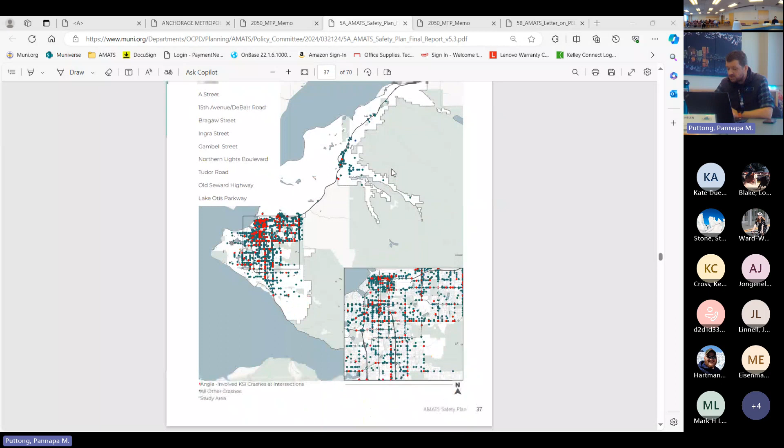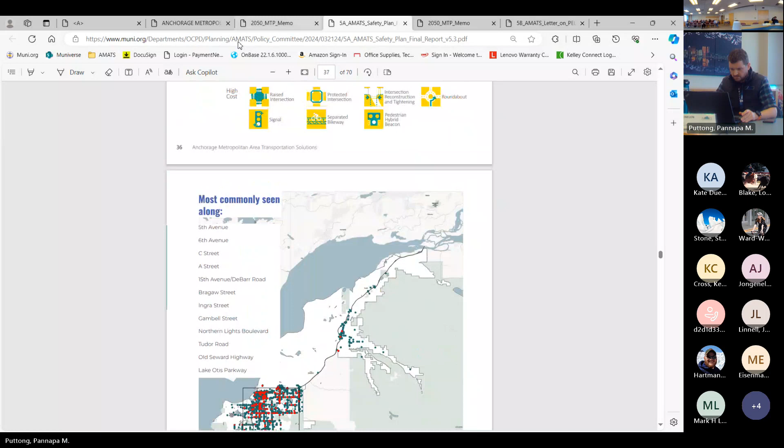And so there are five profiles, and they all have that kind of information, as well as information about their locations, the typical, most commonly seen locations. And if you could scroll to page 46 real quick.

So this is chapter 5, where we're talking about priority locations. This is where a number of locations were developed. You can scroll down two or three pages to page 49. So this map right here shows the crashes, intersection and segment crashes for our community.

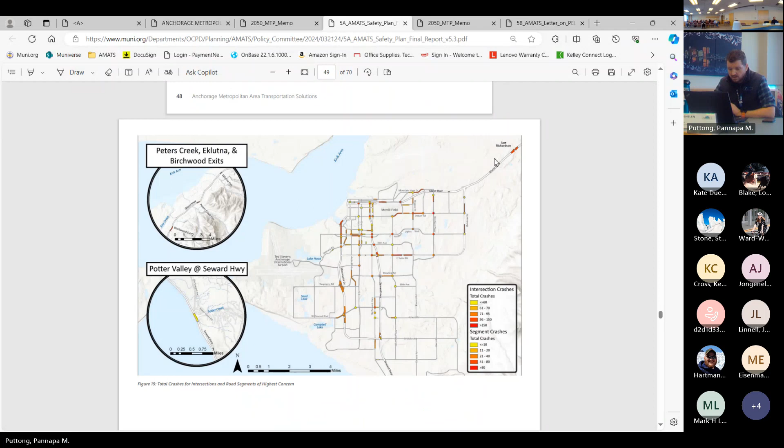So this is both Anchorage and Chugiak Eagle River, and it shows the areas with the highest crash numbers. This is what really drove a lot of the profile information that we talked about before, in this chapter. This chapter took a look at the crash information that was gathered, the data, and then developed a number of additional considerations, equity, which you can scroll down one more.

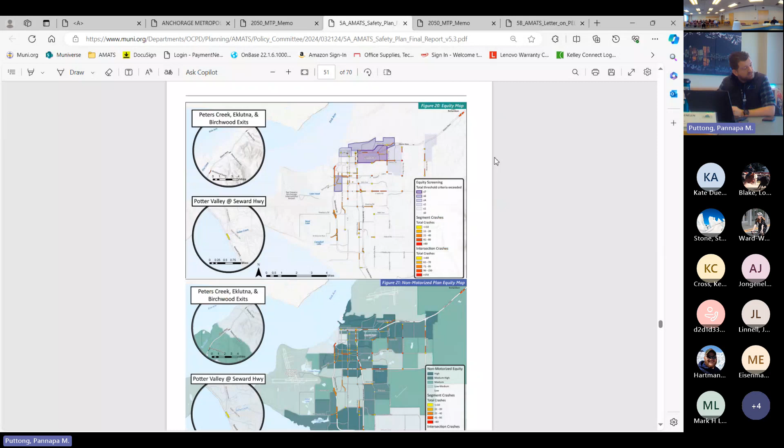There you go. So we talked about equity and then priority modal networks for the non-motorized plan. Scroll down one more - you can see the maps that were developed for equity. And if you scroll down a little more, you can see the maps developed as part of the non-motorized network. So we basically compiled all this information to come up with priority locations that should be focused on as part of this plan. Go ahead and scroll down to page 55.

So these locations were prioritized into two tiers, tier 1 and tier 2 corridors. Tier 1 corridors were the ones with the highest crash numbers, but already have projects programmed or planned for them.

As you can see here, Minnesota is one example. We already have a Minnesota corridor plan underway that will take a look at what to do in that corridor and can account for the crash information developed as part of this plan, making recommendations on how to address it. Same with Tudor, A and C Street, 5th and 6th also have plans.

Tier 2 corridors were selected or developed from high crash areas that don't have projects already planned or programmed. You can see a number of the corridors are in Northeast Anchorage, and then a couple in South Anchorage.

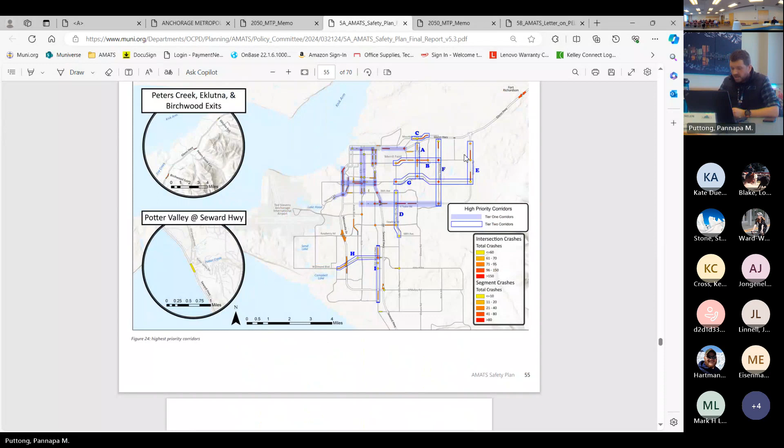If you can scroll down to page 57, please. There were a total of 9 corridors that were selected or identified through the priority assessment and provided for public review and discussion during the stakeholder and public meetings. Out of those, 5 locations were prioritized for further review and investment to include as a corridor profile. Go ahead and scroll to the next page and we'll go through these one at a time.

The first one is Bragaw Street, corridor A, Northern Lights Boulevard to the Glenn Highway. As you can see from this map, there is a list of the types of countermeasures that can be used, the notable collision patterns observed, and the collision history. This is going to be helpful as projects are developed, since safety is one of the considerations for projects. It helps guide some possible countermeasures to address concerns in the area.

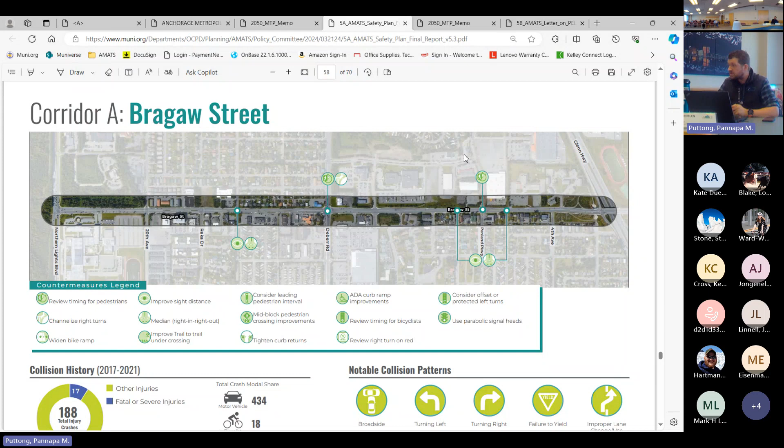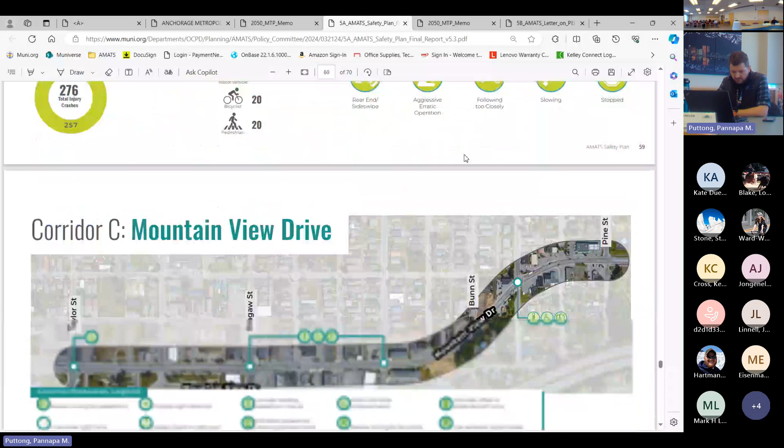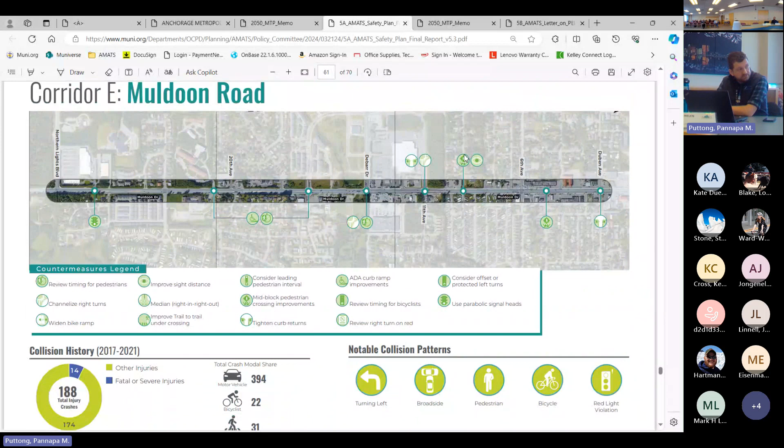Next, corridor B is DeBarr Road from Lake Otis to Boniface. Next is Mountain View Drive from Taylor Street to Pine Street. The next is Muldoon Road from Northern Lights Boulevard to Debarr Road. And then the last one is Northern Lights Boulevard, from Lake Otis Boulevard to Muldoon Road.

So this plan, hopefully if it gets approved, will start to be integrated into the AMATS process. It's anticipated that as we develop future criteria for our MTP and TIP, we'll start referencing the AMATS safety plan to show that projects are aligned with our safety plan or helping to address these priority locations that have been selected. There's a lot more that can go into it if needed, but I think I'll stop there and see if you guys have any questions.

Thank you, thanks Aaron. We did have a joint committee working group on this. Yes, we did, the Technical Advisory Committee of the Policy Board. I don't know that everybody showed up, but it was helpful.

Does anybody have any questions or comments from the committee for Aaron? Are we doing comments now, or questions and comments? It's questions and comments from the committee, then it opens to the public and comes back for action. I have a comment then.

Page 42 of the plan talks about potential engineering countermeasures when there are no bike lanes. One of the low-cost potential engineering countermeasures is prohibiting right turns on red.

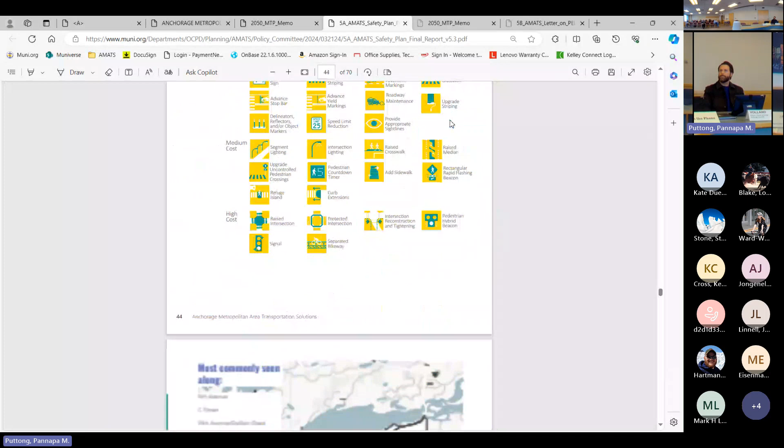I hate to be legislating traffic laws, but besides that, we talked about it at our working group, there's a few errors in the data. The ones that came up were, for instance, on page 41, it speaks to crashes indicated in areas of no sidewalks. But on that page it has 3 roads as examples, and all 3 of those roads have continuous sidewalks from start to finish. Similarly, on page 45, it speaks to uncontrolled accidents that occur at uncontrolled intersections, but then some of the data shows crashes on intersections that are clearly controlled.

I know it's important to get the plan approved so we can move forward for funding, and I don't know that any of those errors are significant. But my thought was maybe we could, and I know the data comes from a different source, it comes from APD and they fill out a form. Maybe that form needs to be improved, but I don't think we're here to do that. My thought was maybe just a sentence in there somewhere that states that some of this data might not be 100% correct. I believe there was probably a crash at the location or near the location shown on the plan, but the exact circumstance might not be 100% correct. So that's the edit I would offer.

I'm not sure of process and how I should offer that. That would be after we get a motion, then an amendment can be made to edit that.

I'll speak on that quickly to provide more information. We have consultants here who helped with this, who could probably speak better, but it is difficult for us on this plan. One challenge is the data we gathered was from the municipality of Anchorage, and the municipality assigns crashes or incidents to the nearest intersection. So when the report's filled out, it could have happened not at that intersection, and there could have been no sidewalk there or no control type at that exact location where it happened, but when it's entered into the system, it's assigned to the nearest intersection. I think these are good comments, and that plus the data gathered from APD speaks to the need for further discussion about how the data is collected, managed, and entered into the systems.

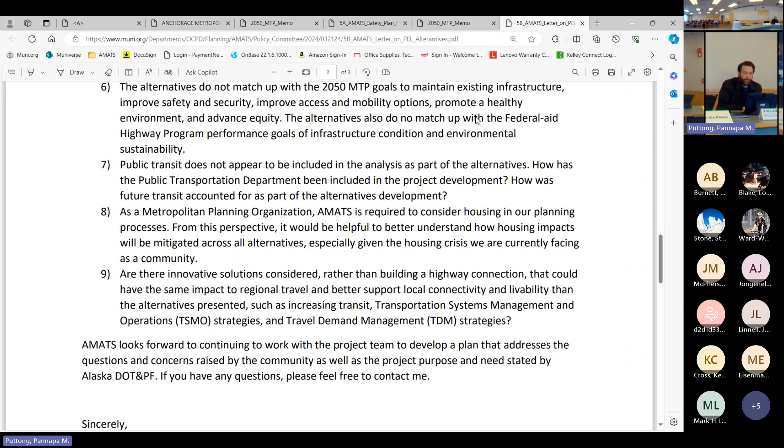That impacts to community institutions should also be analyzed and presented. Capture that sentence: that impacts to community institutions should also be analyzed and presented. Do I hear a second to that motion? I'll second for the purposes of discussion.

Dan, would you mind giving more information as the reason for this? Thinking of Greater Friendship Baptist Church, historic places in Fairview, I think really representing honestly to the community what those trade-offs look like when it comes to right of way, which historic community institutions would have to be relocated with some of these alternatives. I think presenting that in an honest dialogue, what those impacts are, is really important to the community.

I think that's part of the process anyway, so I won't object to that amendment. Any other comments, Mr. Chair? Mr. Young, is there an opportunity to add a friendly amendment to the amendment? We allow friendly amendments. Yes, I would offer a friendly amendment that would add public and private institutions, because I think there is a need to analyze things like Merrill and impacts to Merrill.

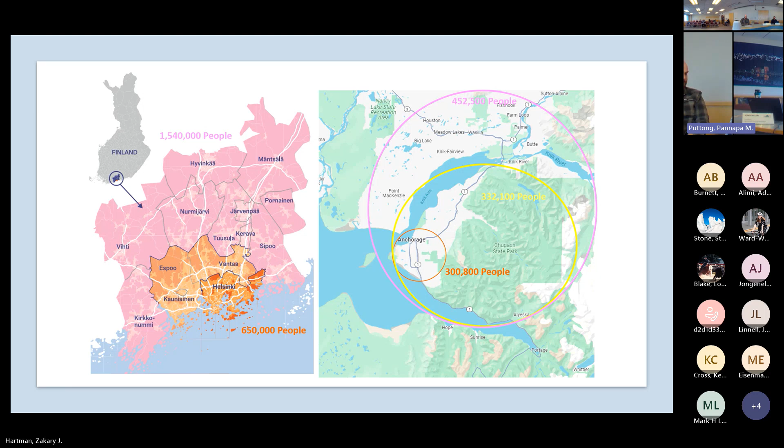Just to do a quick comparison, so we understand the differences between Helsinki and Anchorage. Helsinki is a lot older, and generally speaking these are scale images. I'd say they're about 3 times as population dense, both in their urban core and in their greater metro area, if you're including Wasilla and Palmer in that equation.

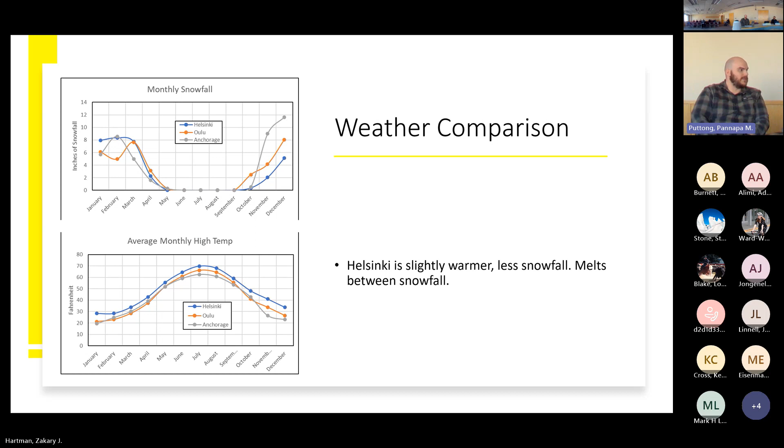Weather is the big one. You might have noticed in the first slide there wasn't a ton of snow on the ground. They're a little bit warmer, a little bit less snow, so they get an advantage where it'll get above freezing and some of that snow load will melt off, making it a little bit easier on them.

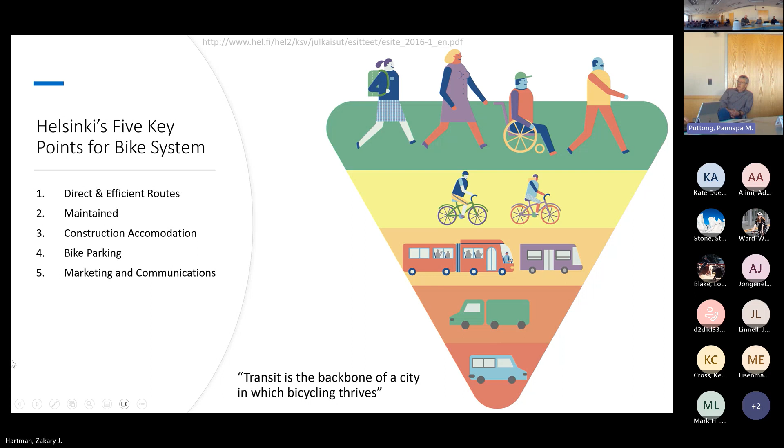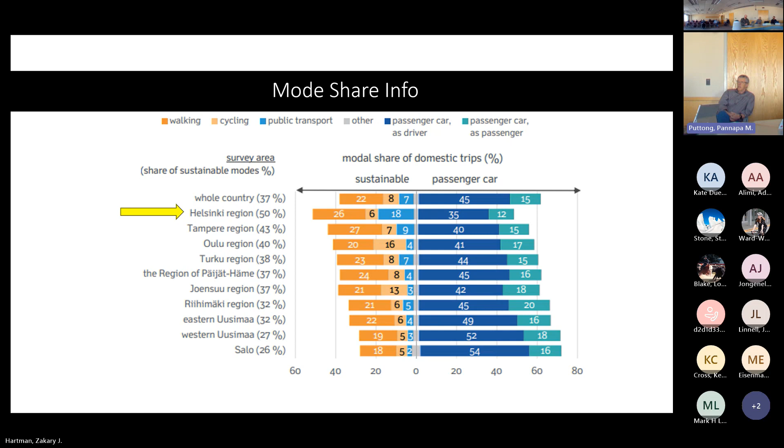Speaking of bike mode share, this is a snippet from their Finnish travel survey. They do it every 6 years, and they've been doing it since 1970. It's really cool to see geographically across Finland and through time how travel patterns have changed. Helsinki's highlighted here with that yellow arrow - the big dense city really shines when it comes to walking, shown in dark orange, they're right at the top for walk mode share. The light blue or cyan indicates their transit use: 18% is double the nearest city in Finland - 18% of all trips by public transport, pretty spectacular.

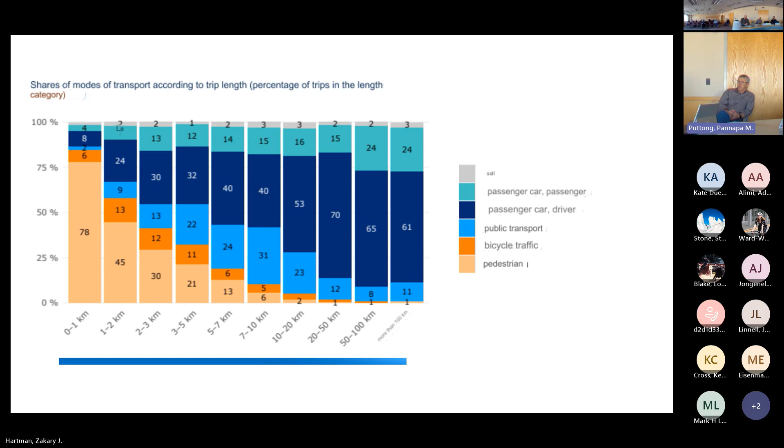So you can see in this graph, people tend to stop walking once it's more than 2 kilometers. They tend to stop biking once it's more than 5 kilometers, then public transport kicks in. And if it's more than 10 kilometers, or 7 miles, they still end up in a car. So this shows that walking, biking, and public transport each have to fit the right situation, and when it does make sense, maintenance and infrastructure can support a mode shift.

This was a fun fact: we learned that Finland is home to the most expensive traffic ticket ever, 121,000 euros, which was cut in half by the courts—it was greater than that originally. They give traffic tickets as a percentage of the person's income. A very wealthy businessman was driving 20 over the speed limit and a speed camera caught him. There's a quote at the bottom where he says, 'I really regret the matter.' So it looks like he owned up to it, even though there was a very hefty fine.

Finland has over 1,000 of those traffic cameras. I believe they're all on the national highway system, and 33 of them are on the highway network through Helsinki.

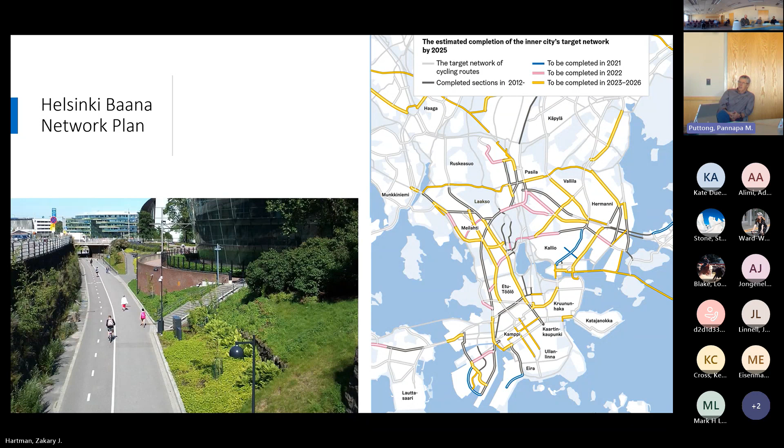This is the bike network they're building out to reach their ambitious 20% mode share goal by 2030. On the bottom left is a Baana, or bicycle superhighway. Basically, they're trying to take their 8-foot multi-use pathways that get a lot of use and expand them into bicycle superhighways. On the right, everything in yellow is their goal to build in the next 3 to 4 years to stay on track with their mode share goals.

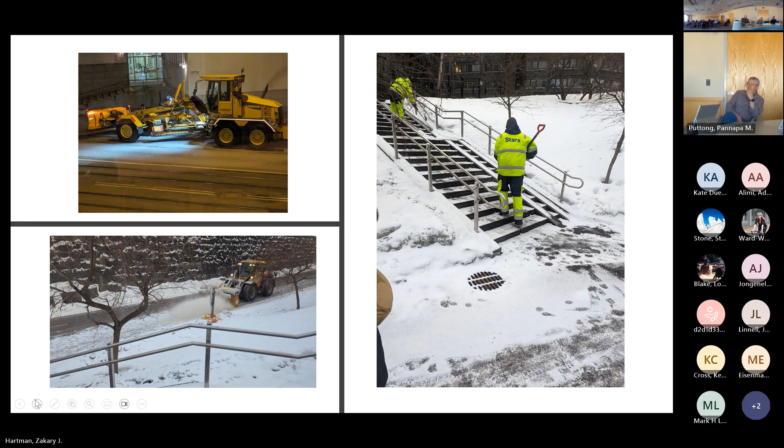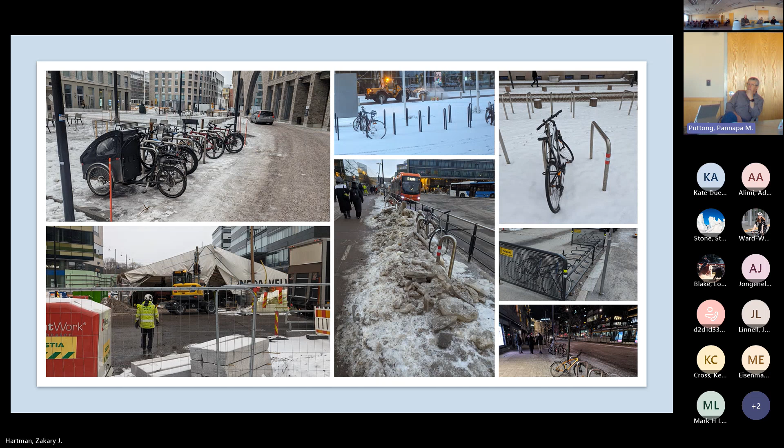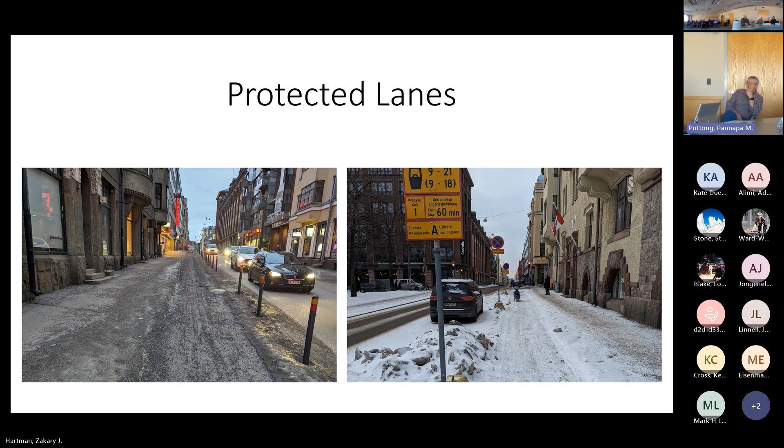Protected bike lanes—I was searching for examples, and these were the only ones I found in Helsinki: like a vertical protected bike lane. On the left is steel bollards on a street bike lane, and on the right is a parking-protected bike lane. So that's what I saw in Helsinki.

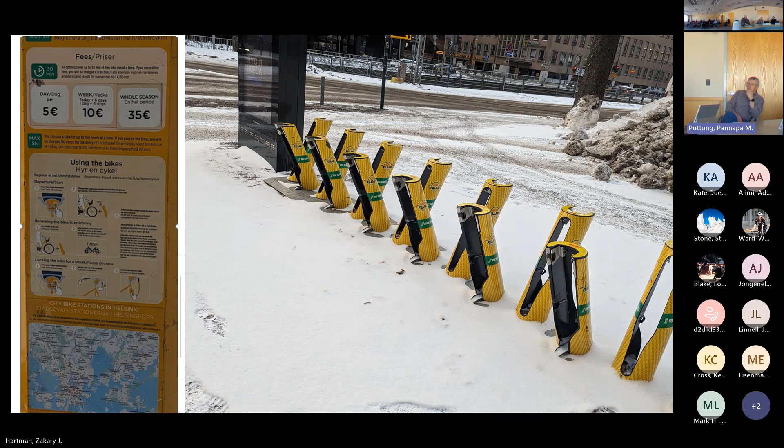One last note on Helsinki: their bike share system. We didn't get to try it out because it's summer-only right now. It's 35 euros for the entire summer, with pretty great rates. They're trying to expand into the winter and add e-bikes to their fleet as well. So that's a quick highlight of some of the stuff we saw in Helsinki.

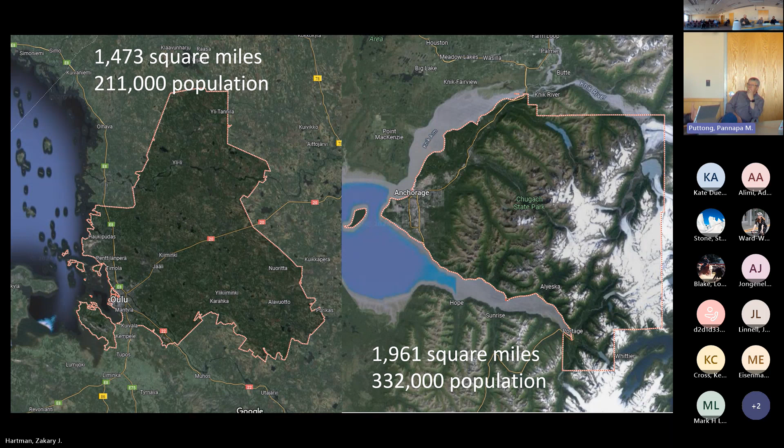Then we went up north to Oulu, much further north. It's still on a body of water, so I don't think it's quite Fairbanks cold, but it's very cold. They're much smaller than Helsinki—generally about 30% smaller than Anchorage, both in land area and population. These are scale images of each other.

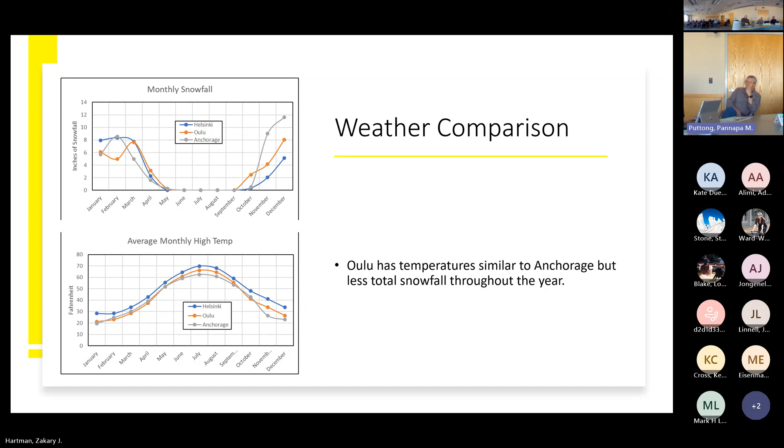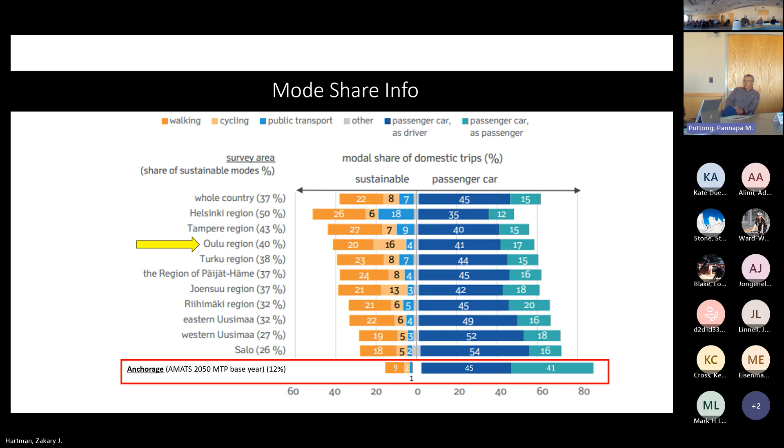Here's back to that mode share chart I showed you. I highlighted Oulu here — that lighter orange is the bike mode share. They're at 16%, more than double Helsinki. They are leading Finland in bike mode share, and they're proud of it. But still plenty of people driving cars, so they still have a plan to expand that bicycling superhighway network.

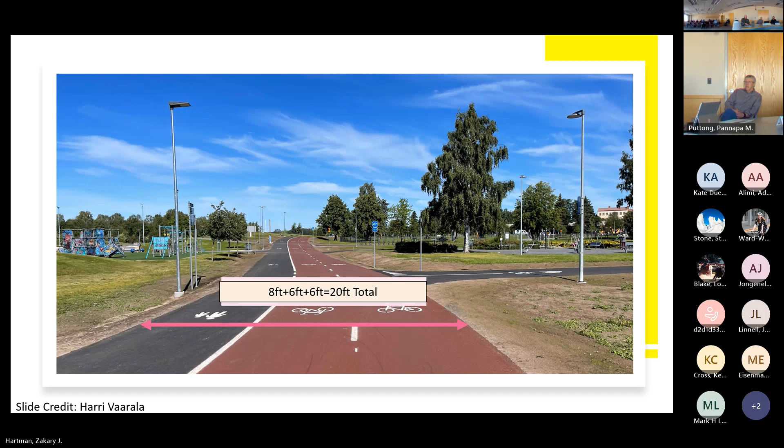A little more detail on what that looks like. When they build it out, 8 feet of black asphalt is for pedestrians, and then 12 feet total for bikes, two 6-foot lanes, one in each direction. That's what it looks like in the summer, in their general core area.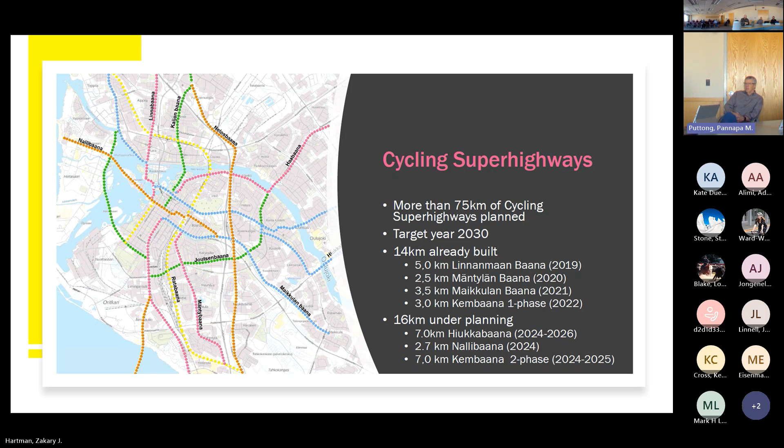I think it's worth pointing out, in the bottom right, these aren't big mega projects. That middle bullet point, 2.7 kilometers of the Nallibaana — that's just less than 2 miles of 20 feet of asphalt, like 2 car lanes. So these are small bites they're taking. They have everything planned out, but they're taking small bites every year to build out this bicycling superhighway network.

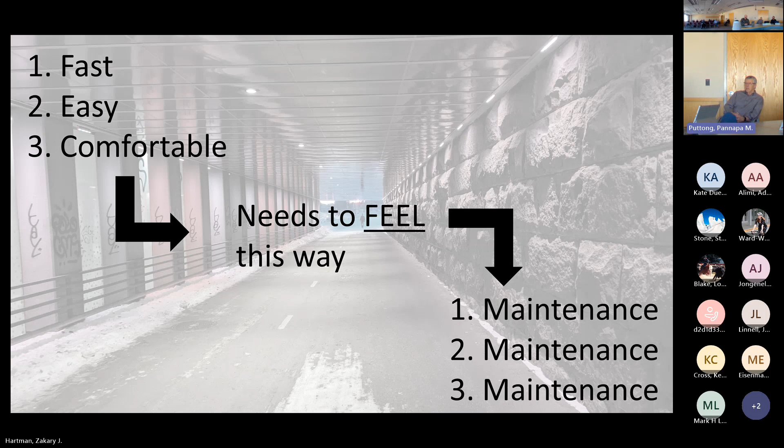This is what we heard from their city bike engineer: their 3 main points are fast, easy, and comfortable — that's what they want for their network. But none of that really matters if it's not maintained well. So what they really say is their 3 key points are maintenance, maintenance, and maintenance. And maintenance, Oulu seems to be very good at.

Their maintenance system generally has 10 areas. Area contracts — 2 are done by public sector employees, 8 by private contractors. In these areas they do everything: the road, sidewalks, pathways, it all belongs to them. But overlaid on top of those 10 areas, they have the bicycling superhighway maintenance contract. So across the city it ignores the administrative borders and just covers the bicycling superhighways. They've been tweaking that contract over the years, and they're proud of where they have it.

So they have these 11 key points they walked us through. From a high level, if I were to boil them down, I'd say you have to put what you want to see in the contract with tight standards, and then, more importantly, have tight quality control on those things. And then secondly, dedicated contractors, facilities, and equipment.

So there's one single contractor that does all those baanas, and within that contract they have 6 drivers and 6 plows, but that's all they do — 20 kilometers, and that's all they do all winter. One person — you know the guy that's plowing your path. They believe that focus really helps the quality and brings a sense of pride to it.

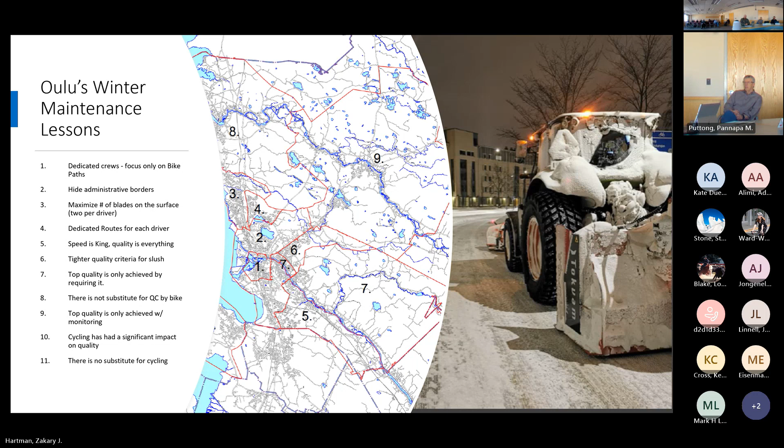This next slide is a good picture of what the bicycling superhighways look like in the winter. We rode like 6-7 hours over a couple of days we were there. It was -20 Fahrenheit, very cold. But we were just on regular bikes with narrow tires — we saw one fat bike the entire time we were there. People just ride what they ride in the summer because you don't really need to worry about it.

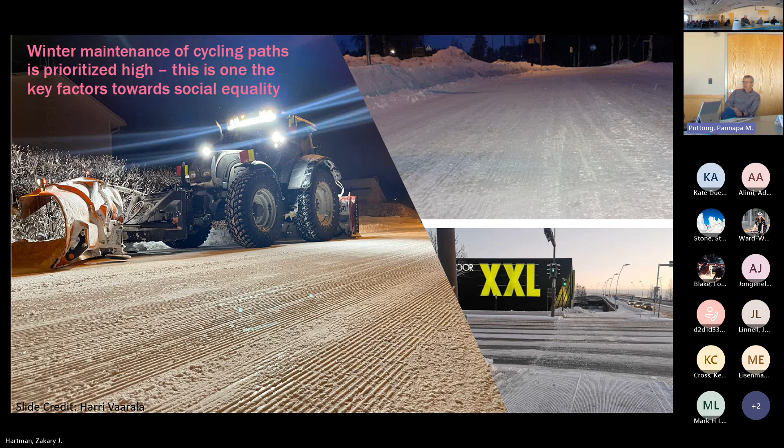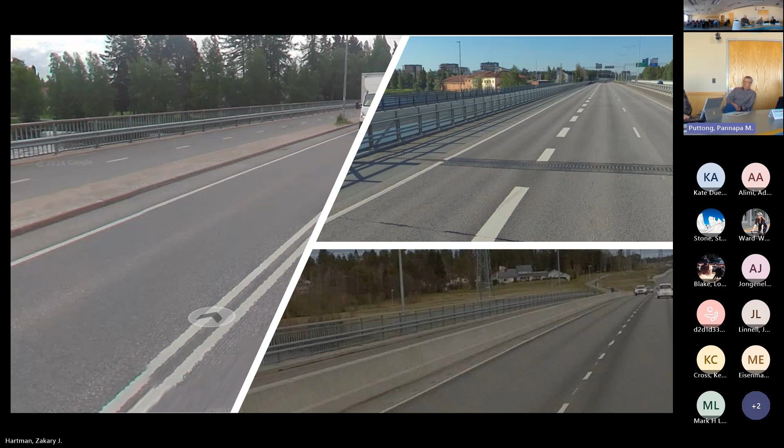And then they really struggle with the haul-out procedures, they just can't do a great job hauling it out. So they said what they like better is this other bridge on the left side of the screen, where it's more separated and you have many feet of space where snow can pile up, and when the time comes, it can be hauled out easily. Their best situation is top right, where you just build another bridge for the pedestrian. Easy enough, right? Just a new bridge. But that's what they shared with us.

Happy to answer questions. This slide deck is a lot smaller than it probably could be, but I don't want to eat up too much of your time.

Yeah, if you guys get the chance to go to Finland, you should go in the winter.

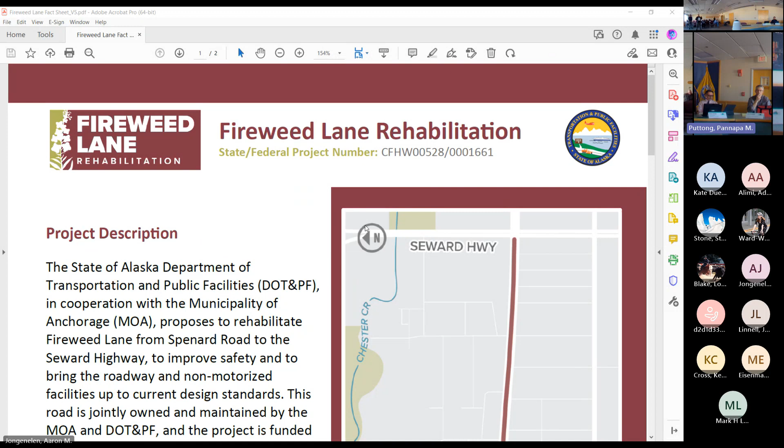We're here today without a presentation, and that's on purpose. The project right now is just engaging and kind of just getting off the ground. Our very first formal action as a project team is to go out to the public. So we've been speaking at a number of community council meetings - I think we've had 4 presentations in the last month, the TAC, and we're here today.

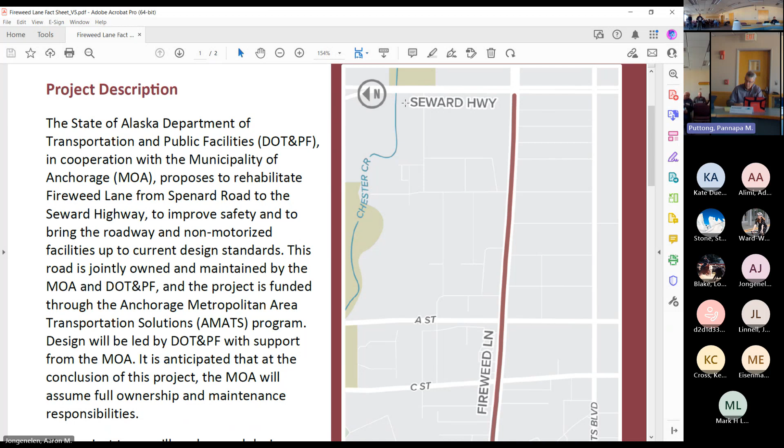The message that we're telling everybody is we've got nothing to present because we haven't drawn a line. We're here to open up the lines of communication, introduce ourselves, get people oriented to the website, and just kind of talk about the limits and talk about some of the rules.

I'm going to give kind of the same speech that we've been telling the public: this is a somewhat complicated project. As an AMATS funded project, it's a federal aid project. It's being led by DOT. The MOA is ultimately the owner. So there's a number of different rules in place here. And it's a federal project.

We've been talking about 2 laws that we have to follow. One, the National Environmental Policy Act - you hear about NEPA quite a bit. That puts some sideboards on things we must look at and talks about steps we have to take. We're also talking about the Uniform Relocation and Real Property Act, or the Uniform Act. That's a set of laws that govern the right-of-way rules, if we get in a situation where there's impacts to right-of-way. So we have to have that in mind.

But as an MOA-owned facility, ultimately we're following the context-sensitive solution process, or the CSS process. So we'll be before planning and zoning, we'll be before UDC, we'll be following all those project delivery processes that we're all familiar with. So 3 big processes or laws that we're following.

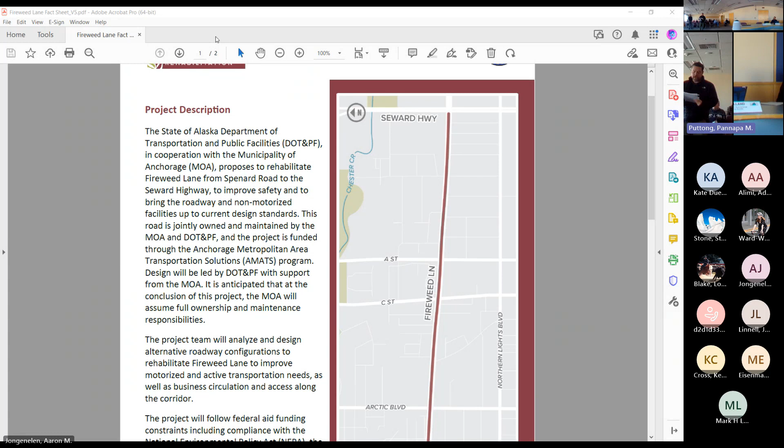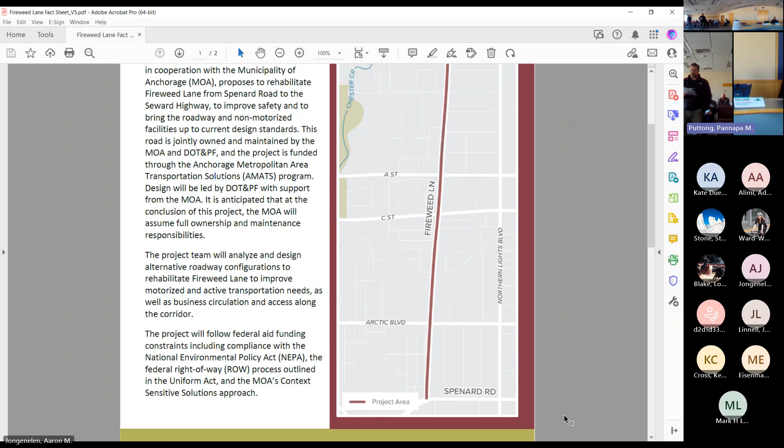I'm going to read our purpose statement, so I make sure I say the exact same words we've been saying. This is what we're telling folks the purpose of the project is: The MOA and DOT are proposing to rehabilitate Fireweed Lane, from Spenard to Seward Highway, to improve safety and to bring the roadway and non-motorized facilities up to current design standards. The project team will analyze and design alternative roadway configurations to rehabilitate Fireweed Lane to improve motorized, active transportation, and business circulation and access.

What we want the takeaway message to be is simply 3 things we have to keep in mind. We have to deal with traffic on the roadway and acknowledge that we have major signalized intersections, terminals, cross streets, 10,000 cars a day on the road. So we have to deal with that.

But we also have 81 businesses - I think there's 81 businesses or private parcels on the corridor, and there's 3 schools on the corridor. So access and circulation are huge. That's a key thing we have to deal with.

And then finally, the active transportation community, the pedestrian bicycle community, almost doesn't have facilities at present on the roadway. So we're not meeting ADA standards with stuff that's out there in the world. We have utilities in the middle of our sidewalks. We don't have a lot of space. It's not serving everybody. So these are the 3 things we're dealing with on the project.

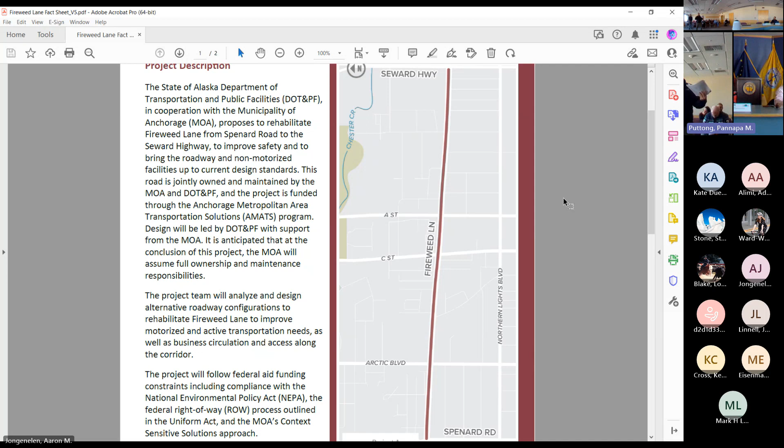And then we're going to look at a couple of combinations, because Fireweed Lane has different utility as you move from west to east. So we'll look at some combinations of 2s and 3s, or maybe 3s and 4s—it might not be one monolithic cross section, I guess is the point I'm trying to make. So our primary source documents are the corridor plan, the non-motorized plan, and the design criteria manual.

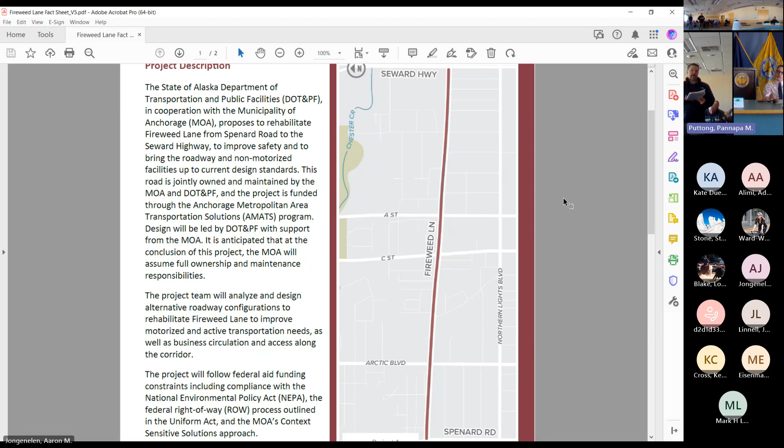We're talking to folks about the schedule. What we're saying is that a really fast bid-ready set of plans, as fast as we could get there—this doesn't mean funded for construction, but biddable—would be 2028. It's plausible, but everything has to go perfectly. We're telling folks to prepare for 2029 to 2030 as probably more realistic.

Our first public open house—what we're doing right now is data gathering and just introducing ourselves to folks. We have 2 more community council presentations next month.

We're shooting for our first public open house about the middle of this summer. At that point, we expect to show lines of the sections from the source documents we're pulling from. We're accepting comments and receiving lots of comments, high interest. Every community council presentation we get has a lot of interest, so we've been trying to address questions as best we can.

The last thing I want to leave you with is the website is up. It went active within the last couple of weeks. It's fireweedlane.com, and we have links to the entire project team there, how you can get a hold of everybody. We've also linked our source documents that I'm talking about today, so you can pull those and if you're curious, go back and look through them.

So that is our non-presentation presentation, and happy to take any comments that you have.

I actually want to add one more thing. We'll also be at the public transportation fair next week. That's next Thursday, the 28th. It'll be at Alaska Airlines Center, 3 to 7 o'clock. We'll be there with the table and can answer any questions. We'll have a nice rollout, and you can point out things if you want to as well.